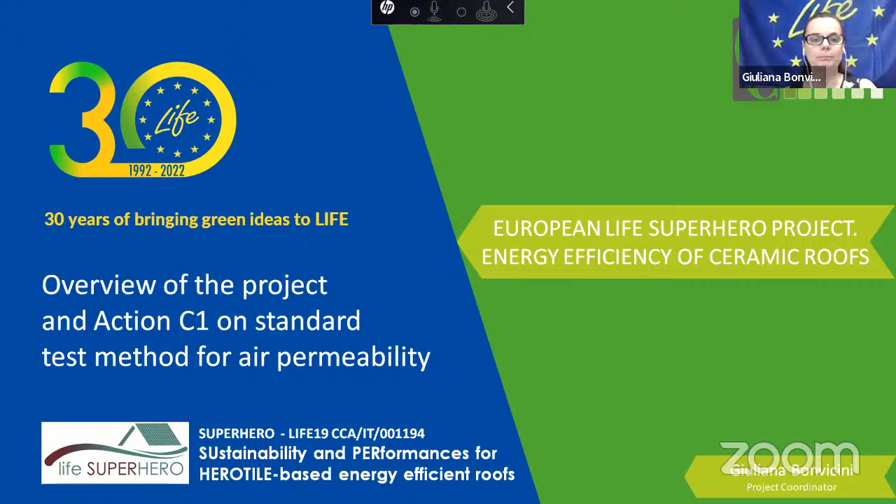And we focus specifically on action C1, which is the development of a standard test method for air permeability.

The problem that we want to face in our project has been quite well introduced by the first speaker, Elena, because as you know, we have to face climate change in these few years, and we had to face summer heat waves many times. Of course, this means that the urban heat island effect in the city and surrounding areas is quite exacerbated, and this creates building overheating while people are living inside.

And people, in some way to reach maximum comfort living in the city, use air conditioning, and that means higher emissions of gas and also high energy demand. And this creates again summer heat waves in the city.

So this is a vicious cycle that we, in some way, want to stop or interrupt. The strategies to do so could be divided into two different goals: the adaptation strategy and the mitigation strategy, with different solutions.

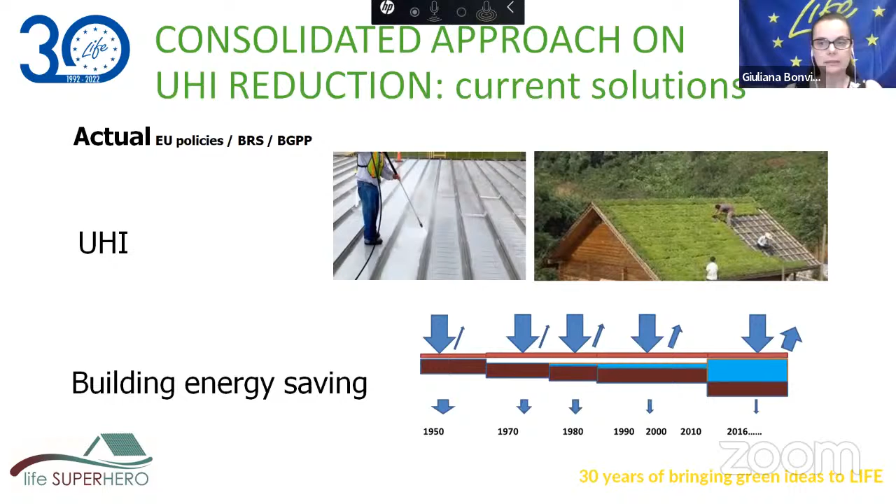What is the impact of roofing technology on the urban heat island effect? I can present this slide because it's a summary of current solutions that we have, for example, in our regulation framework in Italy.

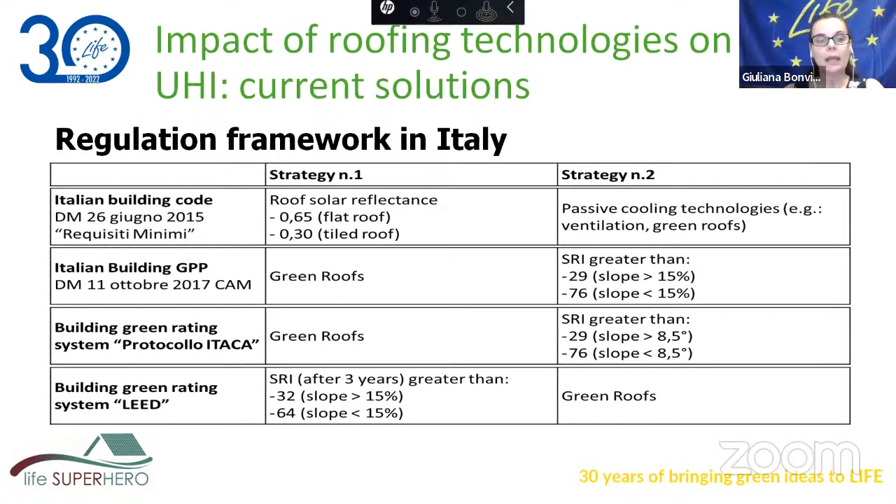If you go through it, we have different codes: the Italian building code, the Italian building green public procurement, a building green rating system called Itaca, and also a building green rating system called LEED.

If we look at the solutions proposed in this regulation, we see, for example, roof solar reflectance, green roof as I've already said, and just one in the Italian building code, we have passive cooling technologies based on passive cooling ventilation.

So if we speak about green roofs, or about flat roofs with tiles, there's no way to push our technology and our product, because we want to push the use of roof tiles made by clay.

What do we propose with this project? We propose a solution using the ventilated and permeable roof, as a sustainable strategy to reduce building overheating.

We can combine with our solution a ventilation system due to the dissipation of heat from the sheathing and roofing material. At the same time, we can couple it with the high permeability of the roof tiles, because we have a discontinuous covering of the roof.

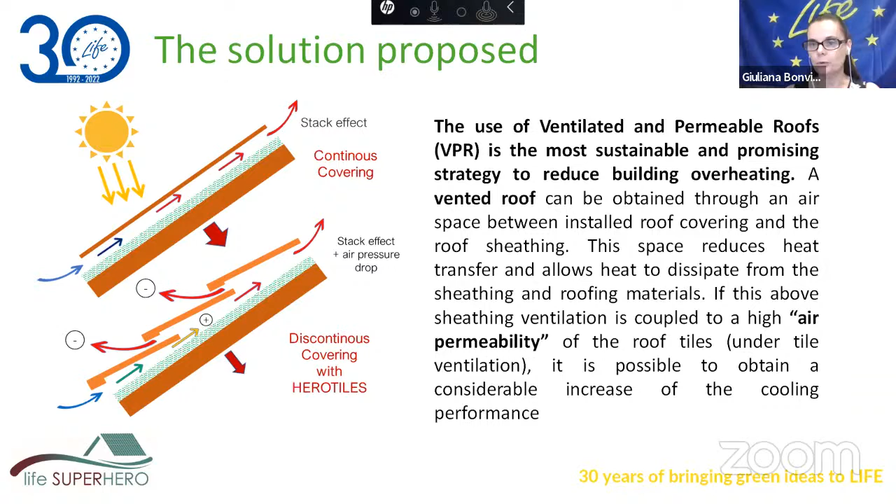And in this way, it's possible to obtain an increase in the cooling performance of the roof, and for this reason, also of the building.

The background comes from another European project called LIFE HEROTILE. This project, already finished, made tests and developed roof tiles with a particular specific shape made by clay. There's no additive, no new material, no non-natural additives in the mix.

This kind of roof based on Herotiles can reduce cooling energy by up to 50% compared to other solutions. But what happened? We found a solution, but we don't have any possibility to push it, because right now the regulation doesn't recognize the cooling potential of ventilated permeable roofs.

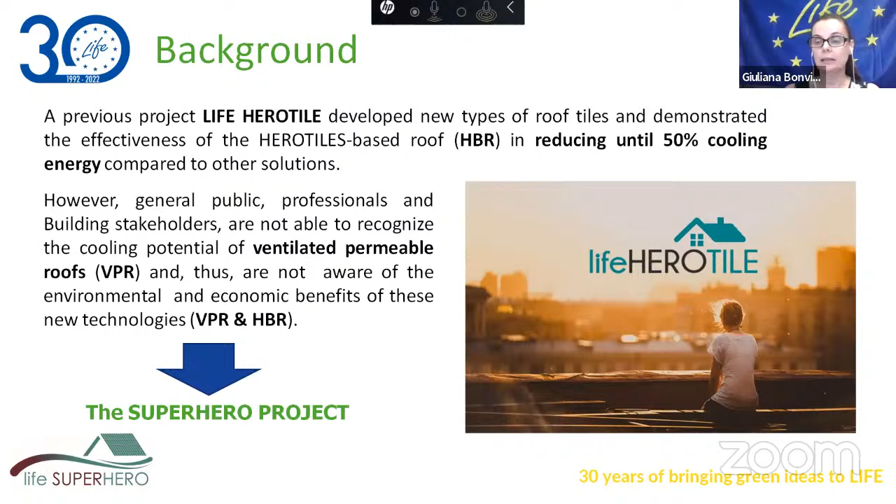So, for example, the general public, the professionals, and the building stakeholders are not aware of the benefits of these new technologies. For this reason, we presented a new proposal for the Superhero project.

I present here the consortium. The consortium is made up of Confindustria Ceramica and Hispalyt, which is a perfect host for us today. They are the Association of Tile and Brick Producers, the Italian and Spanish associations.

We have in the consortium Industrie Cotto Possagno, Terreal, and Edilians, which together cover more or less 50% of the European production of roof tiles made by clay.

And then we have Centro Ceramico, that's me, and the other speaker representing CTMNC, and also Università delle Marche. We are three research centers in Italy and France, able to test the performance of the tile roofs.

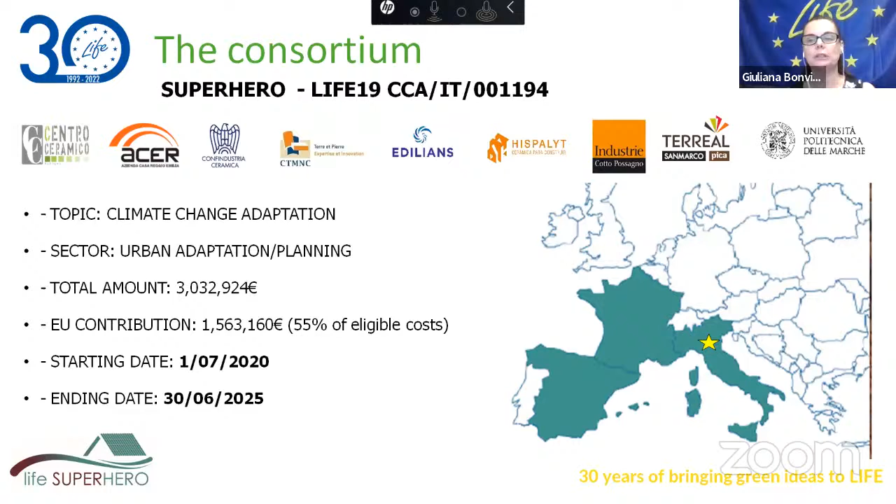The project is quite long, it's 5 years, under the LIFE program, and the specific topic of this program is climate change adaptation. We started the project in summer 2020, and we hope to finish on time in June 2025. What are the objectives and the scope?

Life Superhero is a best practice project. We want to promote the use of this ventilated permeable roof, because we strongly believe it could be the perfect system for passive cooling of the building, increasing building occupants' and city summer comfort—this means an adaptation strategy.

And also, we think it's possible to decrease the building's energy use and greenhouse emissions, offering a mitigation strategy for the situation we have to face right now.

To do so, we exploit the activity in 4 main pillars illustrated here. The first action, C1, is a standards and regulation proposal. We want to overcome the lack we face in regulation to diffuse the ventilated permeable roof, acting at different levels: diffusion on regulation at European level, at member state level, and at technical scale. We want to go from product to building level.

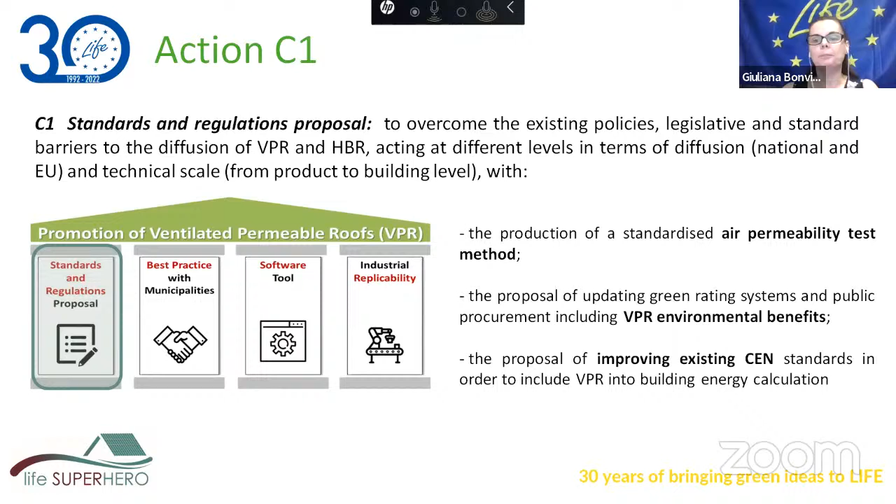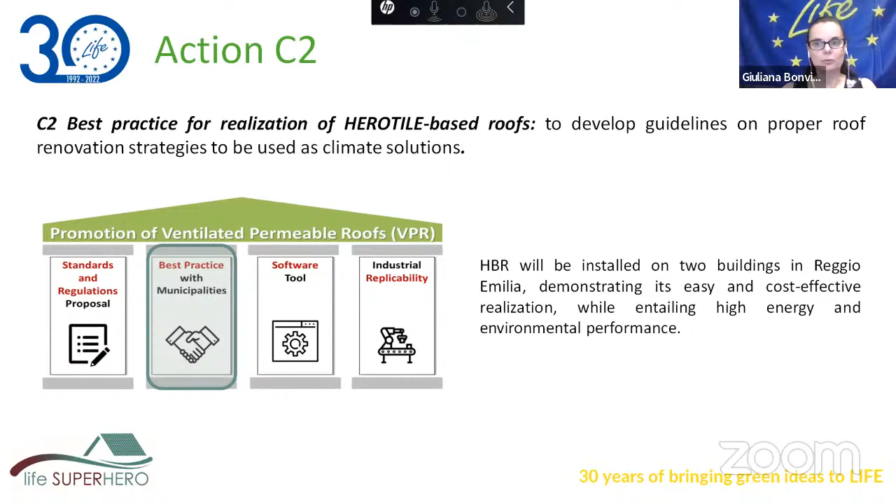Implementing a standardized air permeability method, proposing an update on green rating systems, and improving existing CEN standards for building energy calculation. The other main action, C2, is the best practice for realization of Herotile-based roofs. With this activity, we want to develop guidelines to renovate buildings using innovative solutions for the roof. The speaker after me will focus specifically on the technical details of this action.

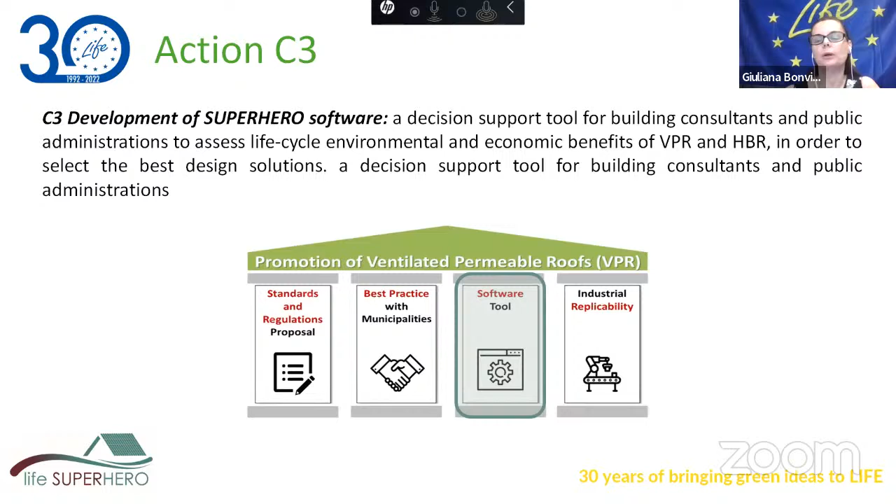Then we have action C3, regarding the development of Superhero software. Because if we want to push this solution on the market and in regulation, we need a support tool for building consultants and professionals, so they can calculate different performances of different solutions applied in a specific building, and have a supporting tool for administrations and consultants to make the proper decision.

Then we have action C4, on replicability, transferability, and best practice creation for tile producers, since we have 3 producers inside the consortium. We want to demonstrate that producing roof tiles for a passive cooling solution with clay is quite easy. So even if they don't produce permeable roof tiles right now, they can change something with no extra cost in the production cycle and be prepared to put this kind of product on the market. We want to amplify all the benefits we can reach thanks to the project.

I will focus right now on the C1 approach specifically, since my presentation will focus on this action. As I said, regulations in force on building energy efficiency are mainly focused on winter saving, neglecting effective solutions for summer cooling.

What we have identified in the regulatory framework to address with this project is the lack of standards. We have no standard properly defining the air permeability of roof tiles. We also found a lack of acknowledgment of ventilated permeable roof environmental performances in building rating systems and green public procurement. And we think something is missing in the standard method to assess VPR cooling performance — we need a method to make calculations and decide which is the best solution to install in a building.

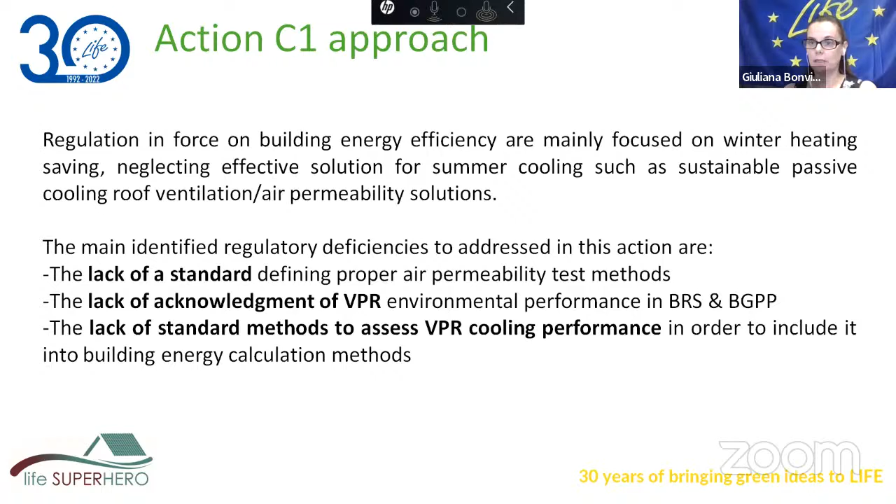I will focus my presentation on action C1.1, specifically the air permeability test method, but action C1 is organized into 4 subtasks overall. One is the method, which we will see after.

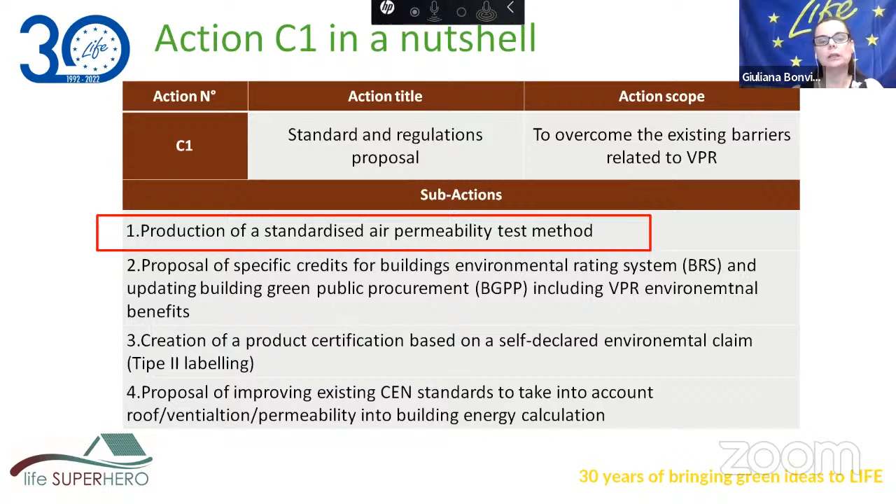The other is the proposal of specific credits for building environmental rating systems and green public procurement, including the VPR benefits we want to show and demonstrate with this project. We create a product certification based on a self-declared environmental claim, label type 2. And we will also propose an improvement of the existing standards to take into account the ventilation and permeability of the roof in building energy calculations.

Focusing on action C1.1, the air permeability test: we need to implement this test because, to put a product on the market, we need a European technical assessment, called an ETA, named Air-permeable roof tiles. To produce this document, we need to...

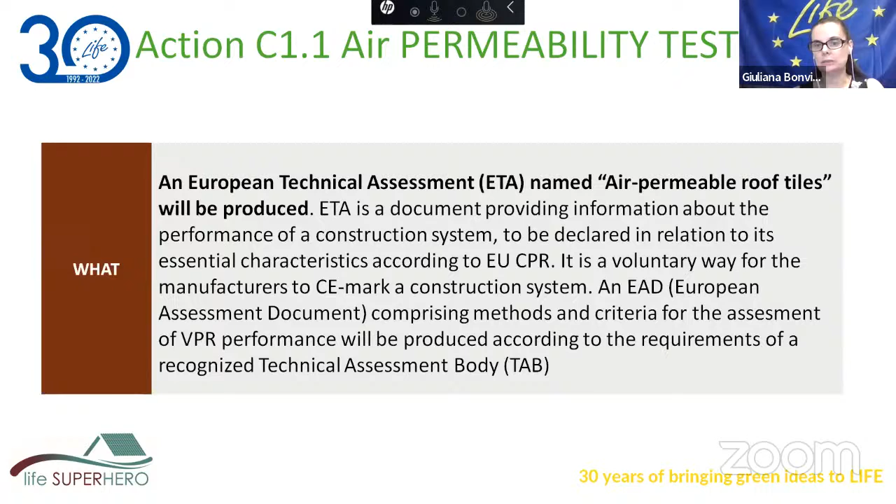develop a testing method that has to be taken into account by a recognized technical assessment body for the assessment of VPR performances. In this way, we can voluntarily apply the CE mark to this construction system, and we will be ready for the market.

I don't know if you are aware of the ETA procedure, so I have a slide summarizing some points. The ETA is based on a European Assessment Document, which contains a general description of the construction product under investigation, the list of essential characteristics that we consider relevant, and importantly, the method and criteria for assessing the performance of the product. We also need to list the principles for implementing the system for assessment and verification of the constancy of performance.

This procedure could be simple, but it could take 5 months if an EAD is already present. We think we need a couple of years to develop it, so we hope to finish all the work during the project.

To do so, how to proceed?

In the proposal, we arrange a round-robin test in 4 laboratories: Centro Cerámico, Università delle Marche, CTMNC, that are in the consortium of the project, and also we involve BMI, an external laboratory that made some tests in the previous project. We organized this round-robin test to collect data and figures for the definition of the standard ETA and the CEN.

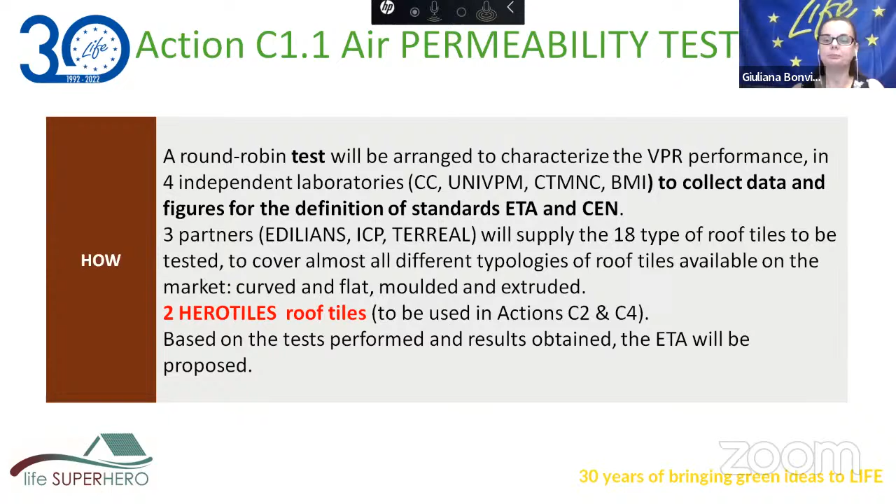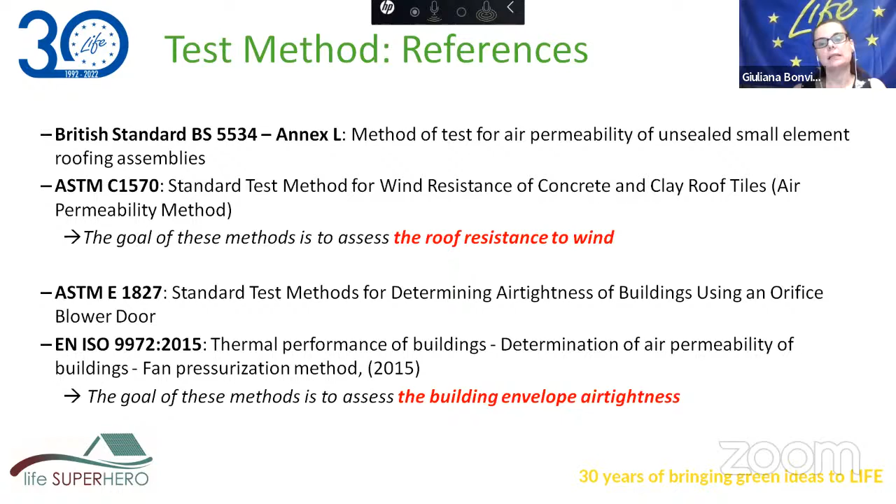For the test method, the first thing for us was to have some references on existing standards. So we found a British standard and an ASTM that are listed here, but the goal of this method is to assess the roof's resistance to wind, which is not exactly the property we want to measure. Then we also have another ASTM and an ISO, but the goal of these 2 methods is to assess the building envelope airtightness.

So we decided to take into account the British standard BS 5534, specifically Annex L. We used this standard in some way to replicate the equipment that we produce and have in the 3 laboratories, so we have 3 twin pieces of equipment in our laboratories.

As you can see, the scheme is quite simple. We have an airflow generator, an airflow meter, and a pressure difference measuring device. Of course, we also need a system to weigh the samples, to measure the ambient temperature and local air where we will perform the test, and a pressure difference measuring device because we want to test a different range of pressure.

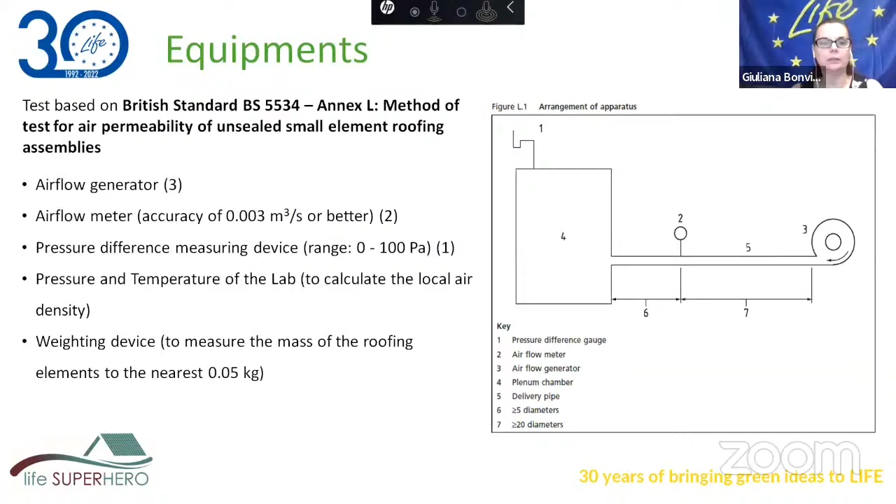Specifically, the equipment is made of a box, called a plenum chamber, made of wood. I have some pictures in the next slide showing the top, on which we will install our roof tiles.

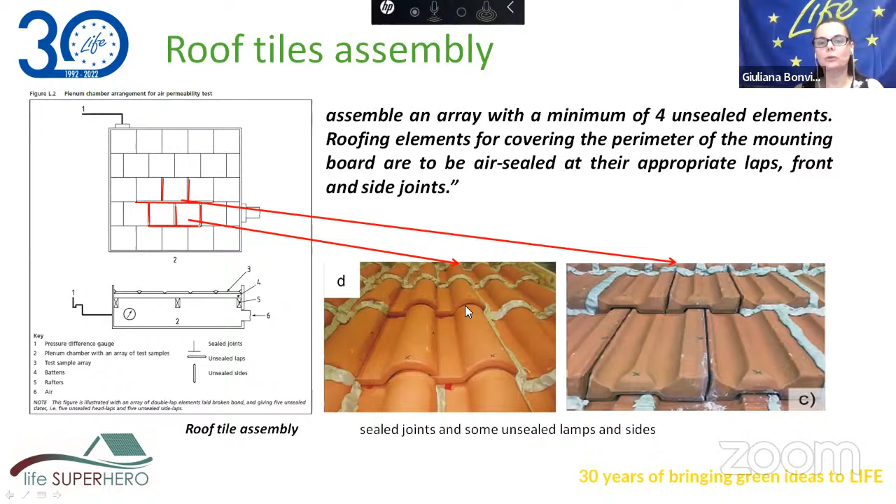According to the standard, we decided to follow it also for this issue, leaving free just 4 of the roof tiles put in the installation.

The experiment consists of blowing and also sucking air down the pipe into the plenum chamber. We will record the difference in air pressure between the inside and outside of the box, and also measure the volume of airflow rate inside the pipe.

In this way, we can determine the pressure drop coefficient that is also used to calculate the permeability factor, because we want to measure the possibility of this discontinuous layer to dissipate heat from the roof, from the building, to the outside.

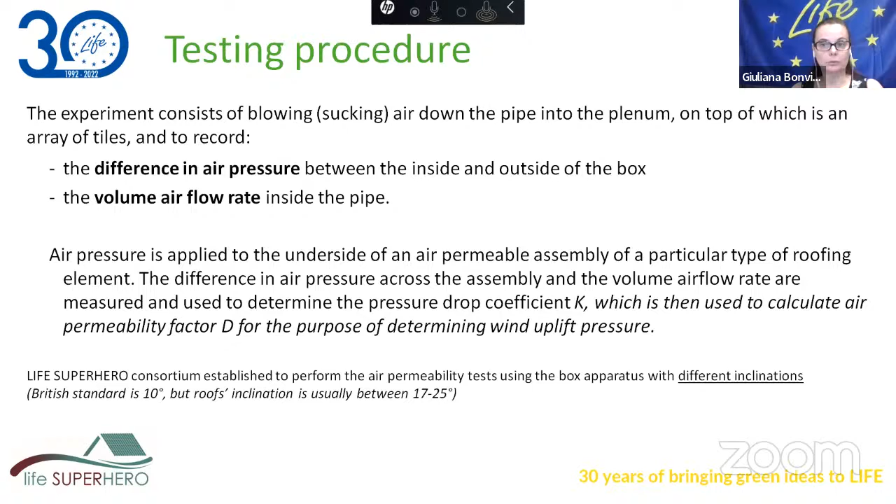Here you will see some of our equipment. This is the one at CTMC. This is the one, for example, at Centro Cerámico. This is the one used at BMI, with an installation of roof tiles on top.

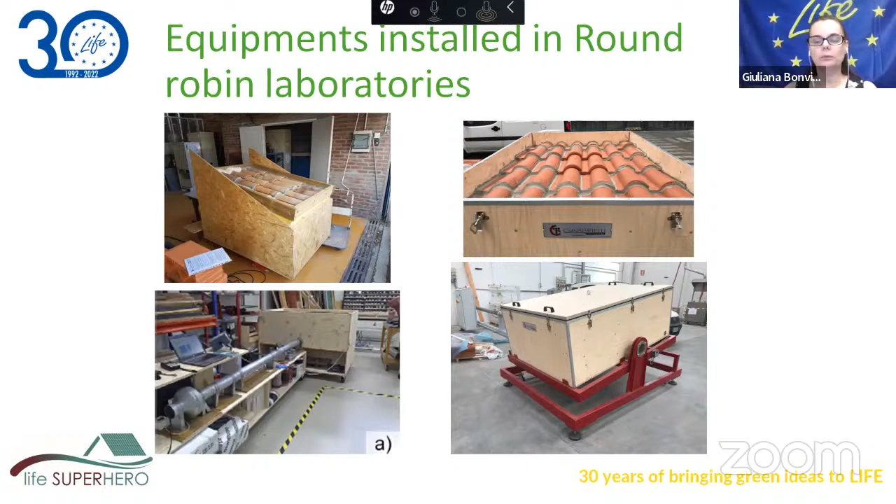So we perform the test, we have to measure and calculate, and also compare the results from the 4 laboratories from a statistical point of view, in order to calculate the air permeability and define the performance of the specific roof tiles installed on the instrument.

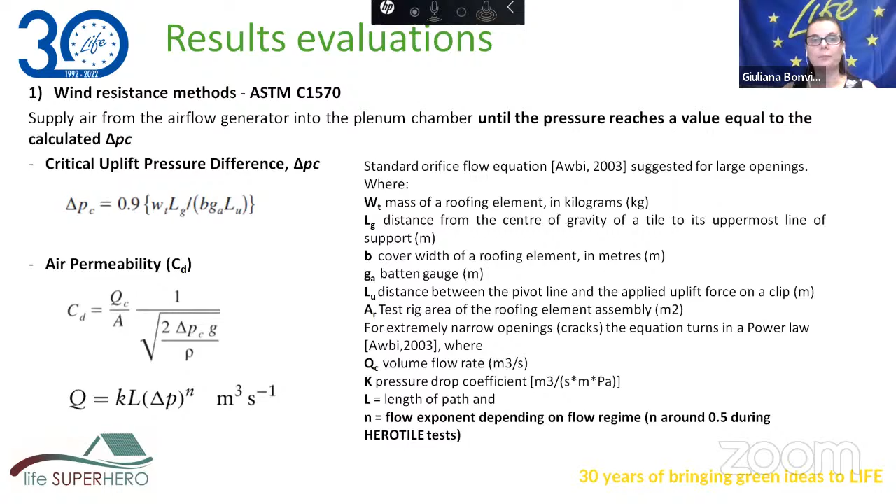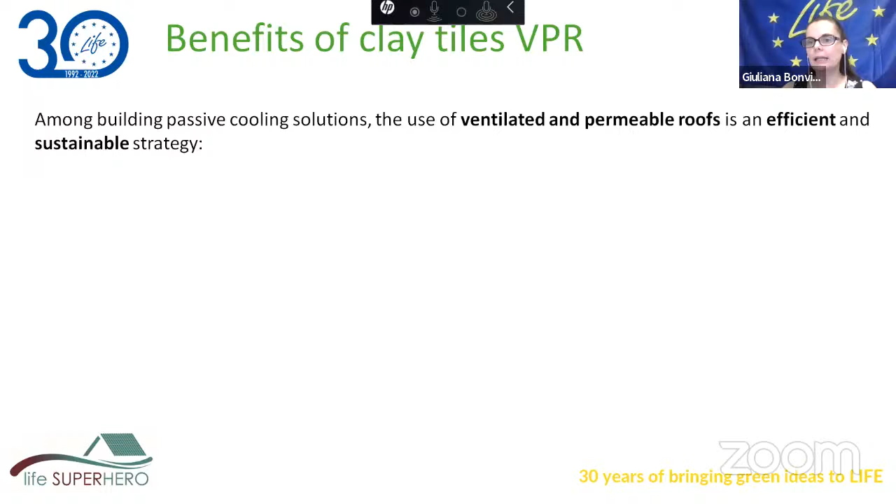All this to do what? We strongly believe that among passive cooling solutions, the use of a ventilated and permeable roof is a sustainable strategy. We can use it to perform and in some way increase the energy rate of the building.

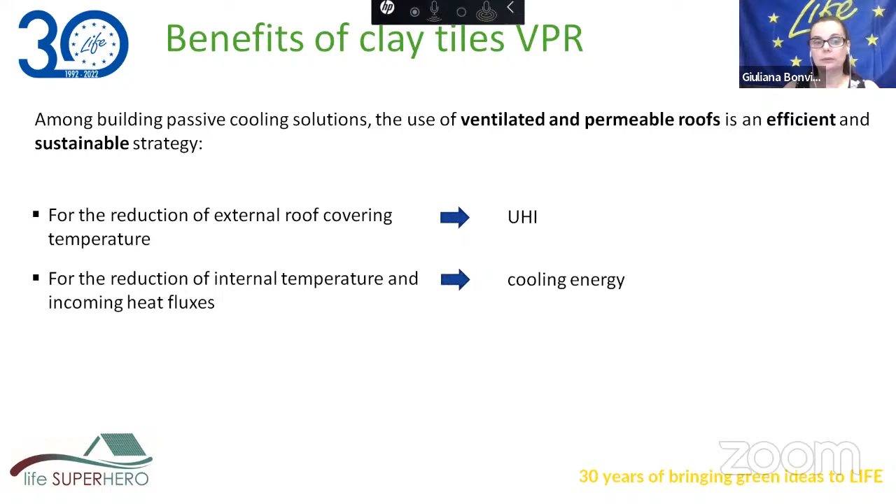We can reduce the external roof cover temperature. In this way, we can mitigate the heat in the surrounding area, mitigating the urban heat island effect. We can also use this installation to reduce internal temperature and incoming heat fluxes, meaning people won't be forced to use more energy for cooling, decreasing emissions of heat, pollutants, and gases in the environment and surrounding area.

We have also demonstrated this in LIFE HEROTILE. We can do this at low cost because, as I said, the transformation of the production cycle is not so expensive, and the new installation of the roof with the tiles is not expensive either. There's no higher cost, no additive cost.

We know that our product, roof tiles made by clay, are durable and sustainable materials. So we can also use this product in a circular economy, as we are doing right now. We also combine this solution with other solutions, so it's not the only one.

So I hope that our study will help push clay roof tiles onto the market and help to face the situation of climate change right now. Thank you very much.

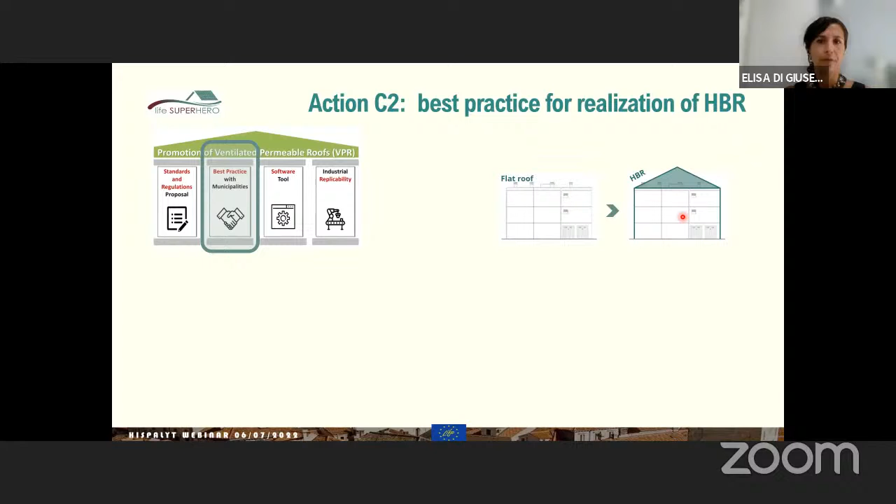The action will be realized on 2 existing buildings, which are currently covered by a flat roof. Over this flat existing roof, a new attic floor will be realized, covered by hero tiles. Monitoring activities will be carried out in these buildings before and after the implementation of the HBR, in order to collect useful data on the thermal performance of the roofs, the indoor environmental quality, and the occupants' behavior.

Action C2 is composed of 3 sub-actions. The first is about the thermal, energy, and behavioral monitoring activity in the buildings. The second focuses on the HBR project and installation. And finally, the third provides the creation of a data sharing platform to collect and share monitoring data with non-expert users, but also with stakeholders and interested people.

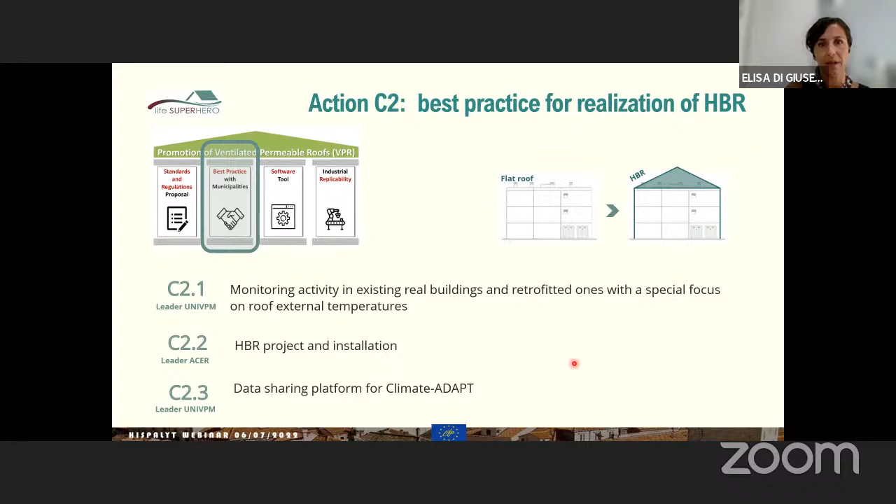So the main contents of my presentation are the following. I will present a description of the Life Superhero building pilots and the renovation plan they are involved in. Then I'll present more details on the monitoring activity on the pilots and the way of data sharing. Then I'll present the preliminary monitoring results on the buildings obtained during last summer. And finally, I will present another activity concerning the measurement of the radiative and optical properties of the building materials, especially the HBR tiles.

Going into some details of the buildings, they are 2 existing multi-story residential buildings located in Reggio Emilia, Italy, with a climate in the range of Mediterranean and humid continental, which is characterized by quite hot summer, so by special thermal stressors in summer.

These buildings have been built in the 80s and have a flat roof. They represent a good context to support the creation of the best practice to shift the flat roof into a lightweight attic floor with HBR. Each building will be covered by a different roof tile typology: Portuguese tiles supplied by our partner ICP in one case, and Marseillaise tiles supplied by the partner Terreal in the other building.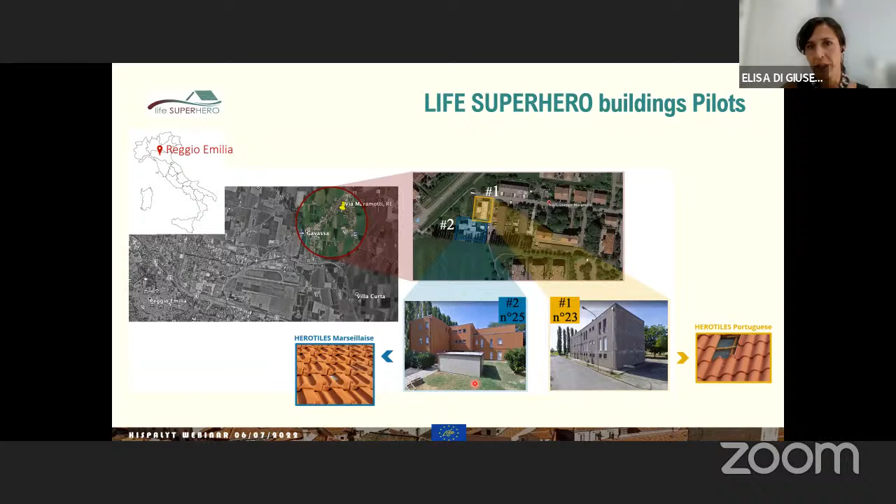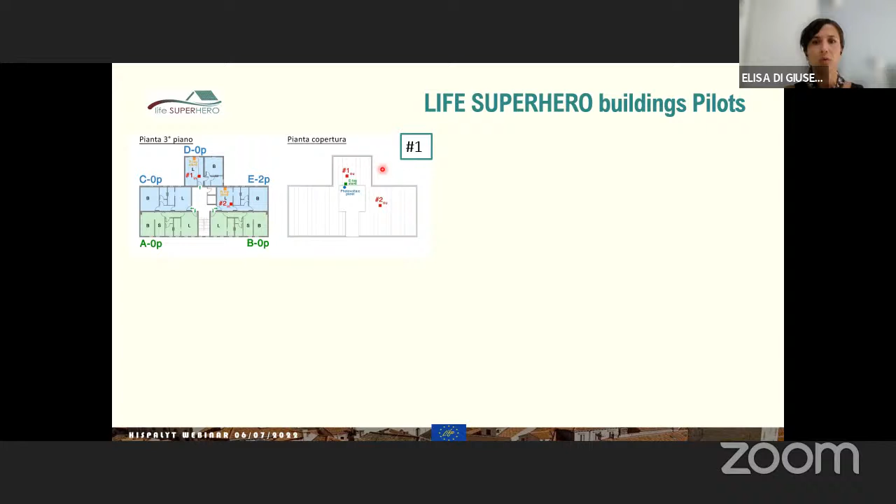The first building has 5 flats in the last level, with a covering surface of about 240 square meters, while the second building has a flat roof in both the second and third levels, covering again 5 apartments for a roof surface of about 350 square meters.

We are going to totally monitor 25 rooms in the buildings, which are actually occupied by 11 people. Unfortunately, some flats are empty at the moment. However, we are also monitoring their thermal condition and energy performance in order to set a proper baseline for the assessment of this performance, even in unoccupied conditions.

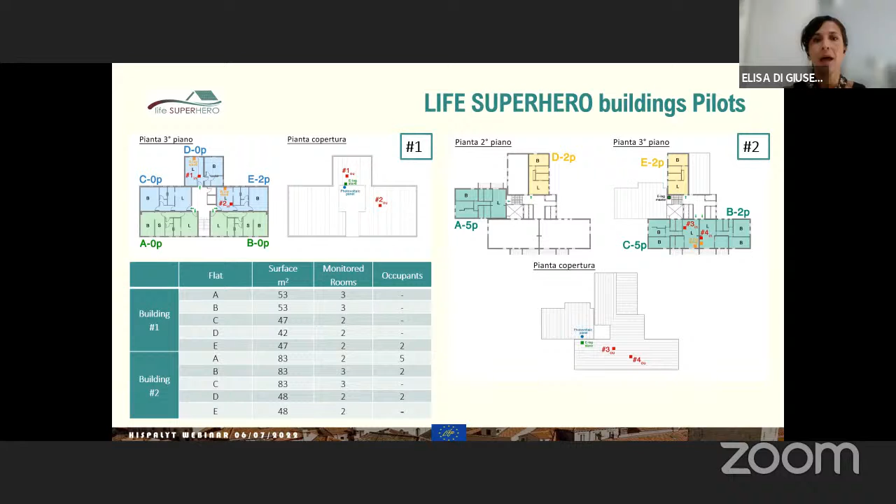The future HBR installation is part of a broader renovation plan which involves the buildings, and this plan will be carried out in 2 steps. During the next autumn, the buildings will be retrofitted with an external insulation layer, and by also replacing the existing windows.

Then during autumn 23, the new attic floor with the HBR will be realized. Consequently, we will monitor the energy and thermal performance and occupants' behavior in 3 different conditions: the existing state, during 2 summer periods, as we already started last June 21 and will continue this summer; then the buildings with the renovation of only the vertical envelope; and finally with the addition of the HBR.

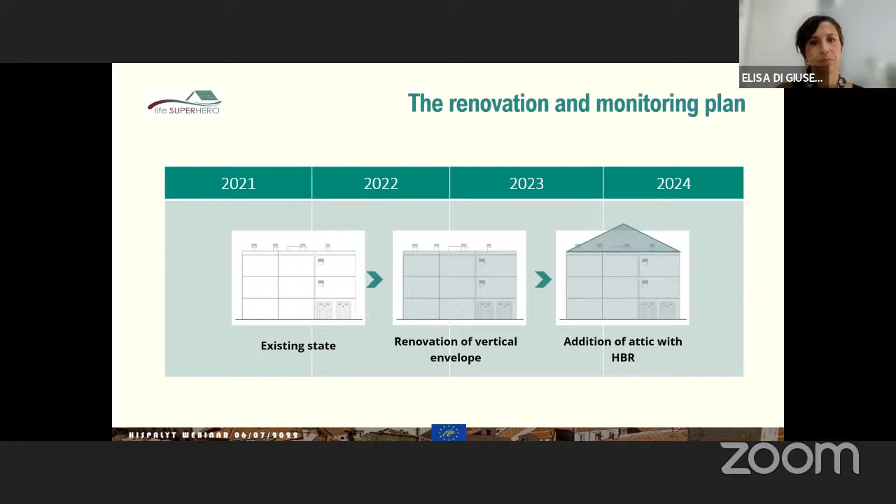A complex monitoring system was implemented in the buildings last year to detect the indoor and outdoor environmental condition, the occupants' behavior, and the roof thermal performance. It consists of low-impact wireless devices connected with the LoRaWAN communication system in order to get a lower impact on users' daily life, and also to allow an easier transmission and data storage. Data are collected from different sources and then aggregated within a database.

A weather station was installed at the height of about 1.5 meters on the roof of building 2 in order to monitor the local outdoor climate condition, such as air humidity and temperature, global solar radiation, wind velocity and direction, and the rain.

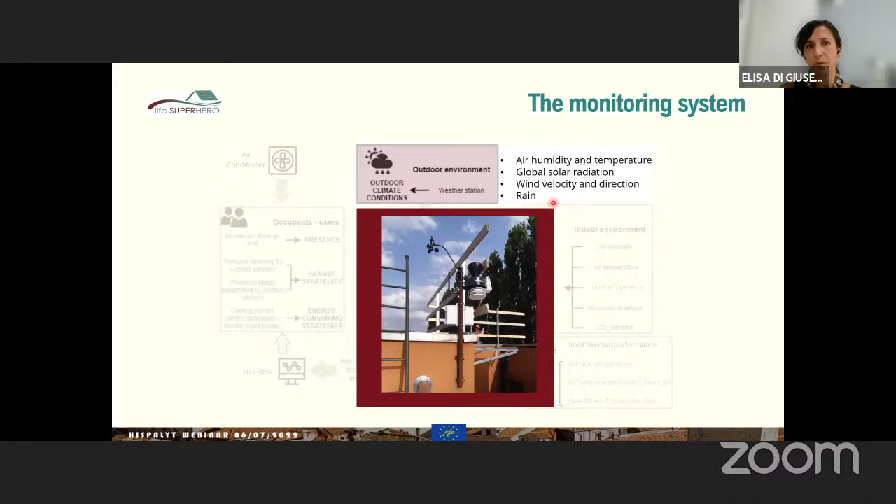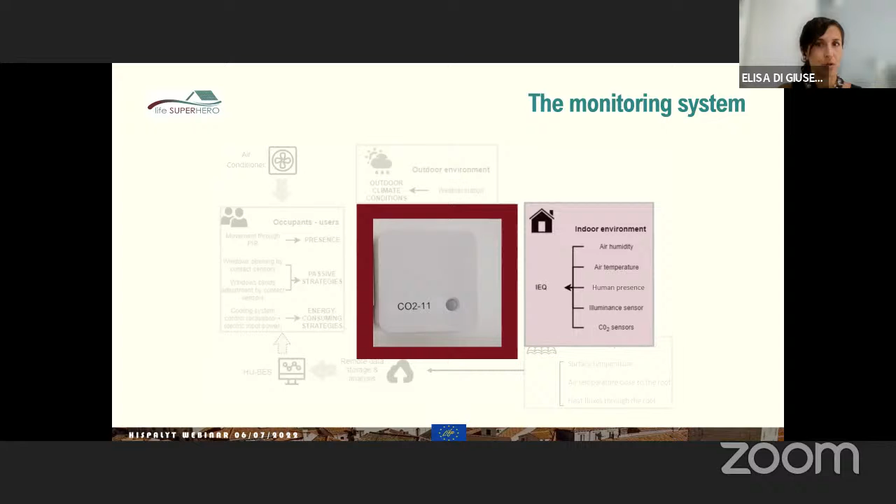In the flats, some sensors, as you can see in the picture, were mounted on the wall for measuring the indoor environment in the living rooms and bedrooms, which are the air conditioned rooms in the buildings. In particular, these sensors detect air humidity and temperature, human presence, illuminance, and CO2 emissions.

Building occupants' actions are also monitored to evaluate the way people interact with building systems to improve their comfort conditions. In particular, we are detecting the windows opening and closing activities with these contact sensors, and also the air conditioning used through some energy counters.

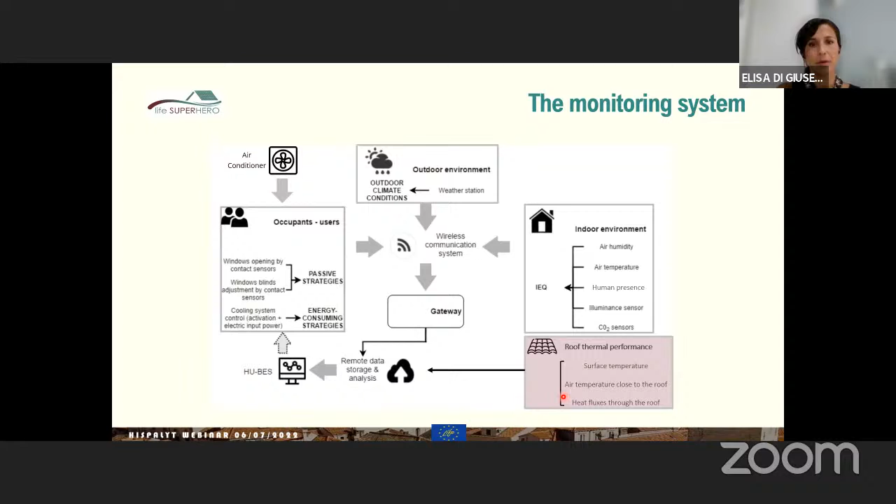We are also regularly performing interviews and surveys with the building's occupants to assess their overall thermal sensation and comfort. Finally, we installed some specific sensors to monitor the actual roof thermal performance.

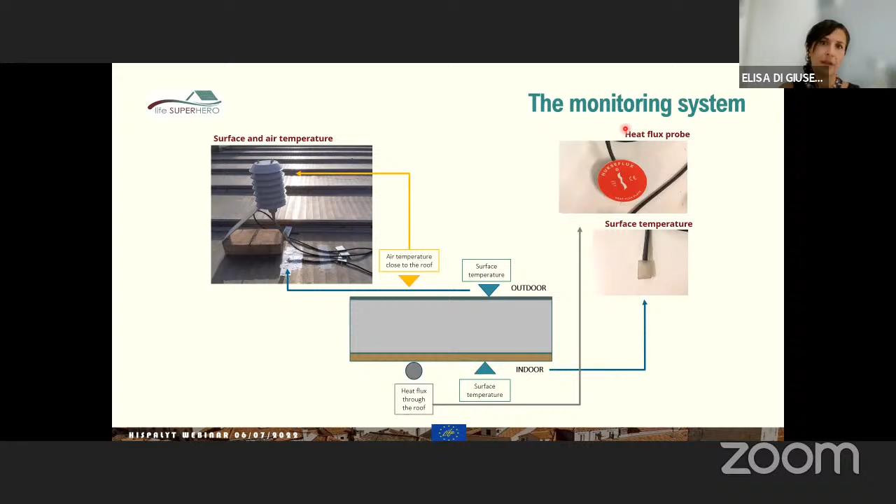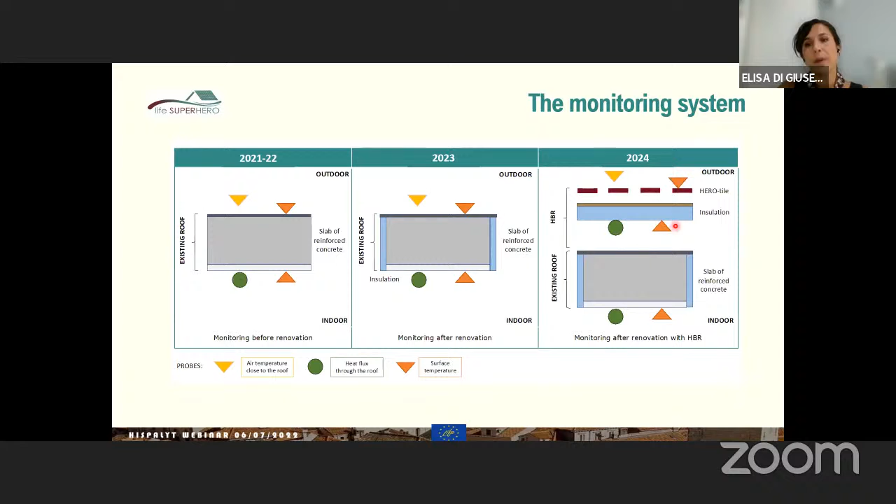Of course, during the next monitoring period, especially when the HBR will be installed in the last project year, the number of probes to detect the roof thermal performance will increase in order to measure the thermal properties in the different interfaces of the HBR, and especially in the ventilation channel.

Within this action C2 of the project, we are also developing an interactive web-based platform to share monitoring data to different stakeholders. It is named Human Behaviors Monitoring Data Sharing, so HUBES.

HUBES will show qualitative and user-friendly data to unspecialized users, for instance the building's occupants themselves, while it will show quantitative data to specialized stakeholders and policymakers, and also to researchers and to all people interested in the project.

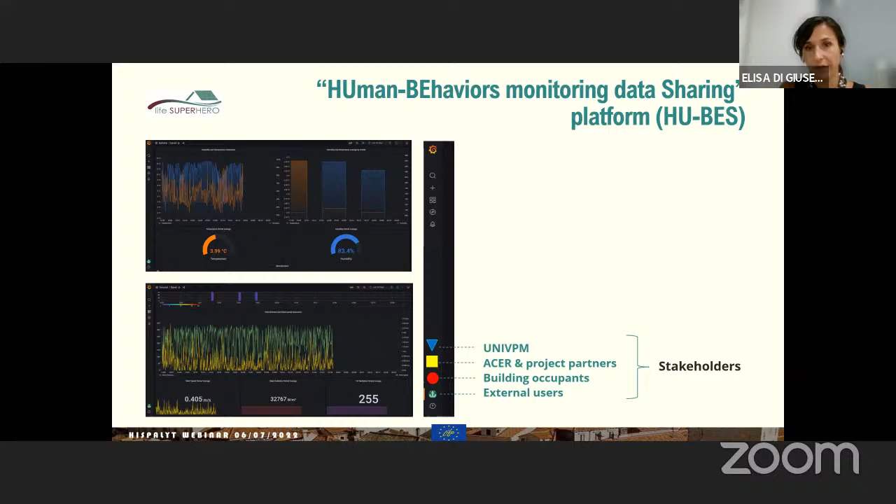This platform will be part of the project website and also diffused through the Covenant of Mayors and through the Climate Adapt platforms. You maybe know these platforms. The first one, Covenant of Mayors, is a movement of thousands of local governments for local climate and energy actions, while Climate Adapt is a partnership between the European Commission and the European Environment Agency on climate topics, and its goal is helping users to access and share data and information.

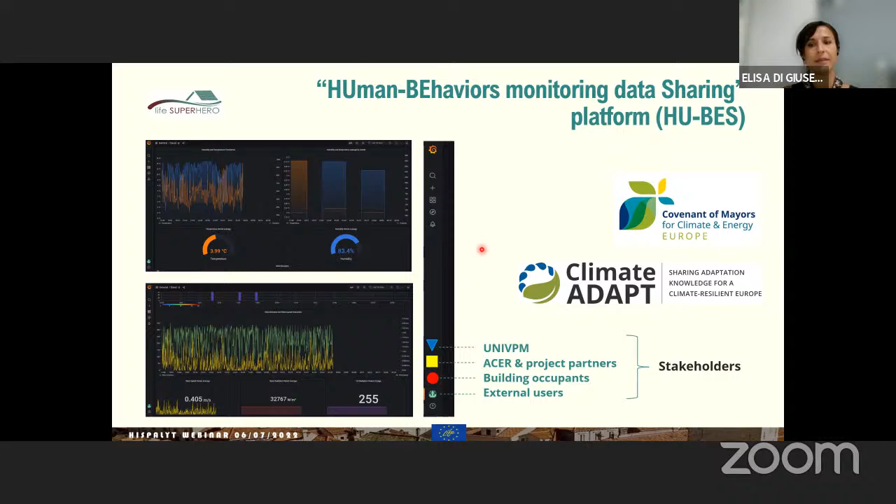So up to now, we are building the architecture of the platform. We managed to insert the separated data from each sensor, and then we are going to aggregate them in selected KPI, that is key performance indicators.

Concerning the inhabitants of the buildings, a web application will allow them to download data and also to receive feedback on their energy behavior and on the apartment performance.

The platform will consist of the user profile, where access to only certain information can be allowed. Then a visualization of the plan of the apartment with the location of the installed sensors, a display of the quantities monitored by each sensor and of aggregated KPI, and finally information on the status of the sensors.

We are also planning to include a message notification system to improve the use of information and also to provide feedback to the users. In this way, the information can be sent directly to the user's devices without necessarily having access to the platform.

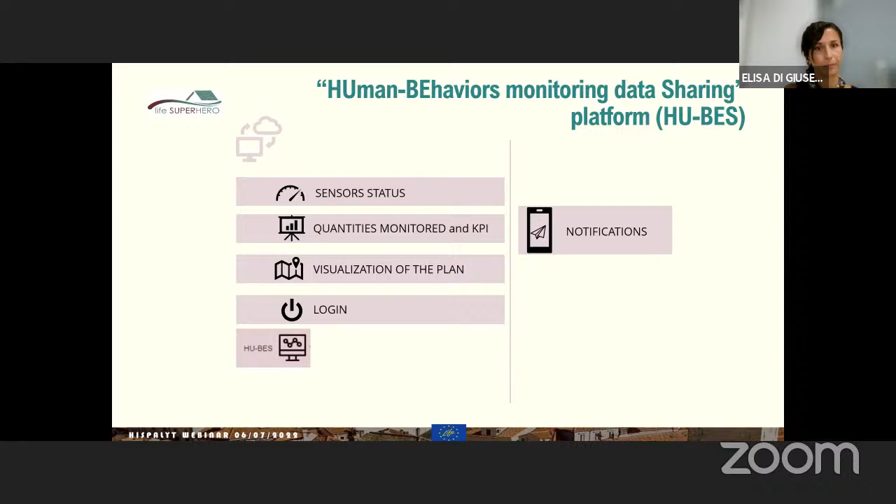Concerning the indoor environment, in these graphs you find the indoor temperature with the red line, together with the external temperature in the black line. The empty flat without air conditioning is characterized by a very high indoor temperature, even over 30 degrees, while the occupied flat has a lower indoor temperature between 23 and 28 degrees, depending on the use of the conditioning system. This is also highlighted by the irregular trend of the line.

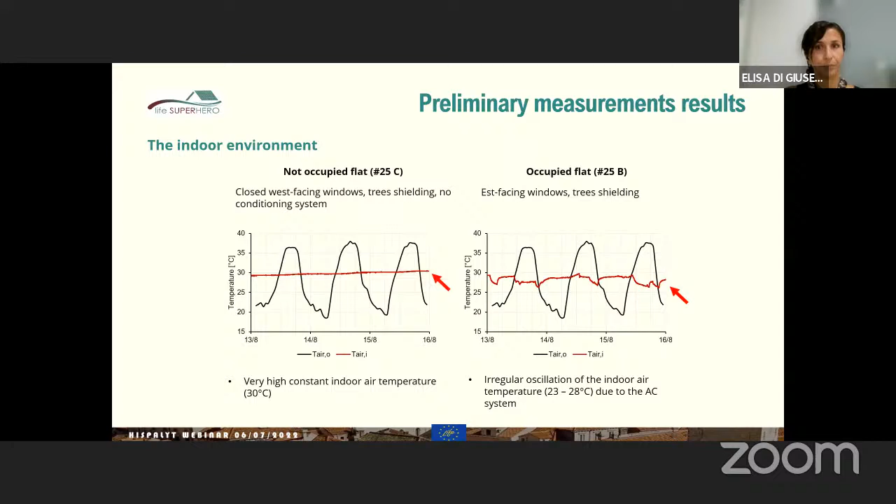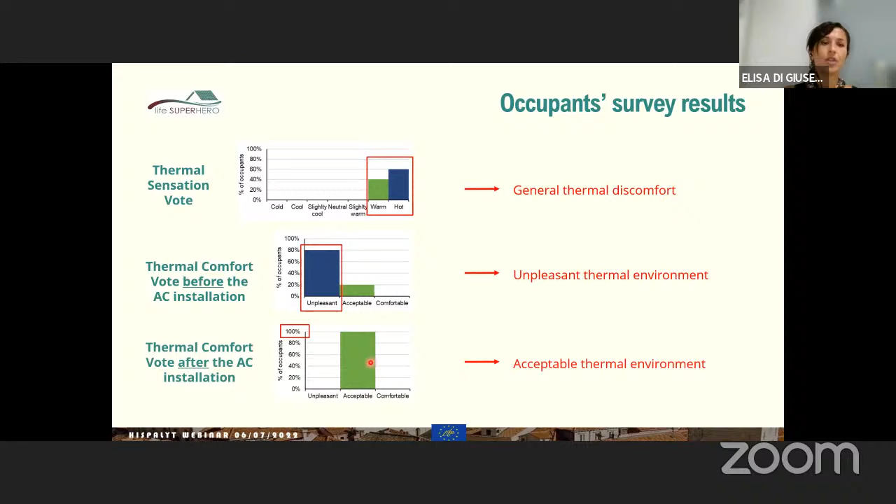Questionnaires provided to the occupants of the buildings confirmed a general thermal discomfort sensation in the indoor environment. All the occupants consider their thermal environment between warm or hot. 80% of them consider it unpleasant in terms of thermal comfort before the installation of the air conditioning, while all of them consider it just acceptable when the cooling system is installed and used.

From the results I presented, maybe you could notice that the recorded heat flux through the existing roof are actually quite low. Indeed, even if the buildings were both realized in the 80s, they present an insulated roof, which is not a common practice in Italy for that period.

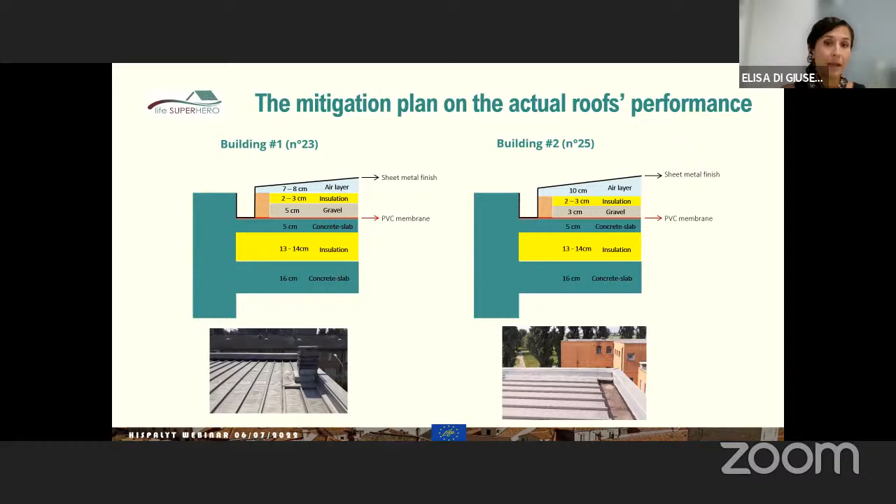We did not know this before starting the project, but we recently realized an inspection on the roof and also discovered that a further intervention has been carried out some decades ago, maybe to improve the waterproofness or the sound insulation of the roof. As a consequence, the existing roof has better performance than that assumed initially. This risks making the baseline performance of these buildings not really representative of typical Italian 60s, 70s, 80s buildings, which means maybe reducing the impact of installing the HBR in the next years.

So in order to mitigate this risk, we decided to perform two further actions. Firstly, in some areas of the roofs we removed the additional layers, and this summer we will carry out new thermal measurements.

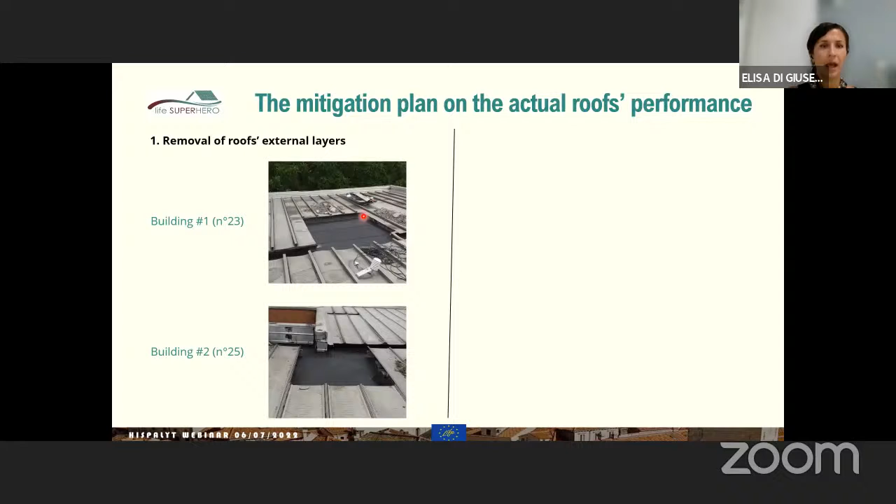The second action is that we are realizing reliable energy models of the buildings, which we can then use to perform parametric analysis, parametric simulations of the performance of the buildings, eventually defining new baselines. This means we will calibrate these energy models against the real collected data, and then we will perform the simulations also in a condition of the roof without insulation, to define a better baseline and a better comparison of the performance before and after the installation of the HBR.

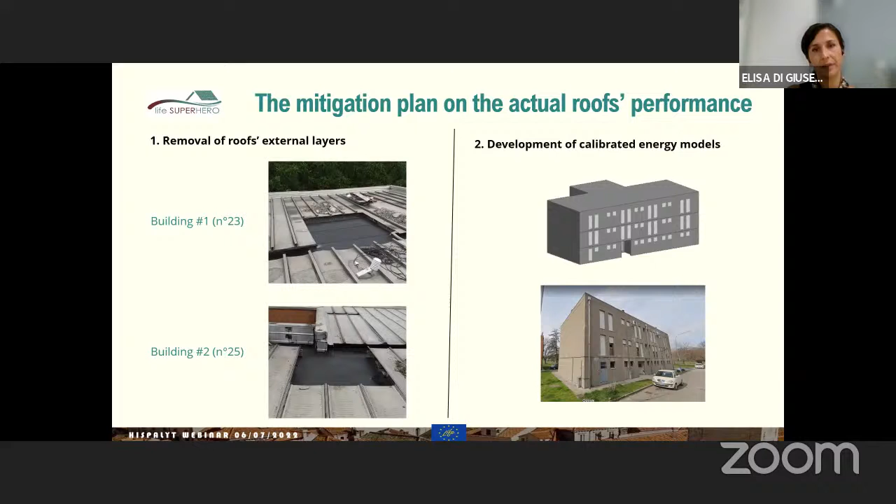And finally, here I'll present a further activity we are carrying out, which is not really part of action C2, but part of another action of the project. It's useful for the calibration of the energy models I just talked to you about, and I think you can find it interesting. We are performing measurements of the optical properties of the materials of the external envelope of the buildings, also including the materials that will be installed, that is the hero tiles.

So actually we started this activity especially from the hero tiles produced by our partners Terreal and ICP. And then in the next month, we will perform further measurements on the material samples removed by the existing roofs of the demo buildings.

We measured the thermal emittance of these samples and also their solar reflectance, and then calculated the total solar reflectance, and from this and from the thermal emittance also the solar reflectance index, SRI.

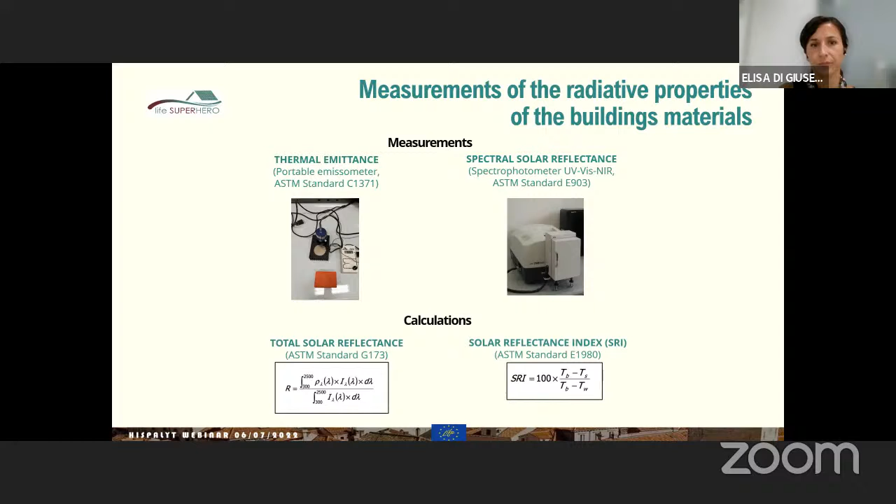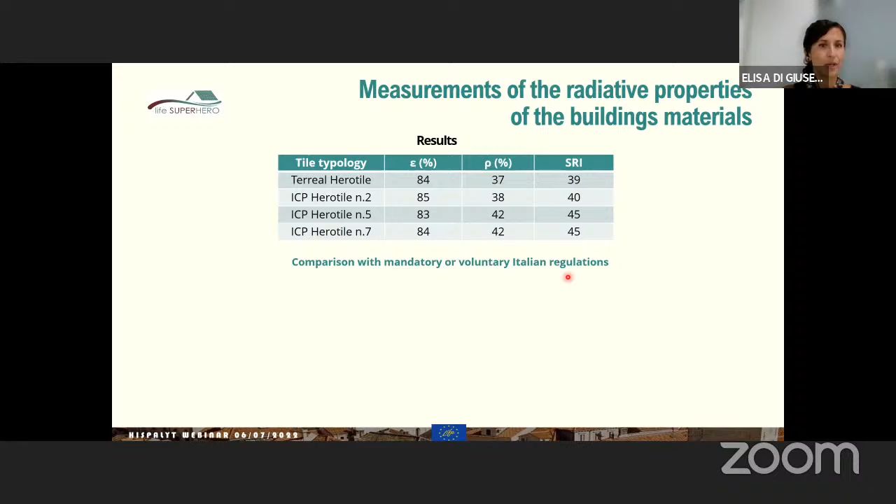So the obtained reflectance is higher than the threshold imposed by the actual regulation on the building's energy performance in Italy. The SRI is higher than the threshold provided by the Italian Green Public Procurement, and also of the value provided by the buildings rating system LEED that you maybe know.

So this result is interesting as it demonstrates a good radiative performance of the hero tiles that can also enhance the global passive cooling performance of the HBR that Giuliana just presented you.

So that's all concerning project action C2, but of course, I'm available if you have some curiosities or questions at the end of the webinar. Thank you very much.

Thank you very much for your presentation, Elisa, and thank you for explaining to us the renovation project to be carried out on 2 existing multi-story residential buildings in Reggio Emilia, Italy, currently covered with a flat roof, where the vertical envelope will be insulated, and finally a horizontal base roof with Portuguese and Marseillais styles will be installed. An interesting project during which the thermal performance of the roofs, the indoor environmental quality, and the occupants' behavior will be monitored by a sophisticated low-impact wireless monitoring system.

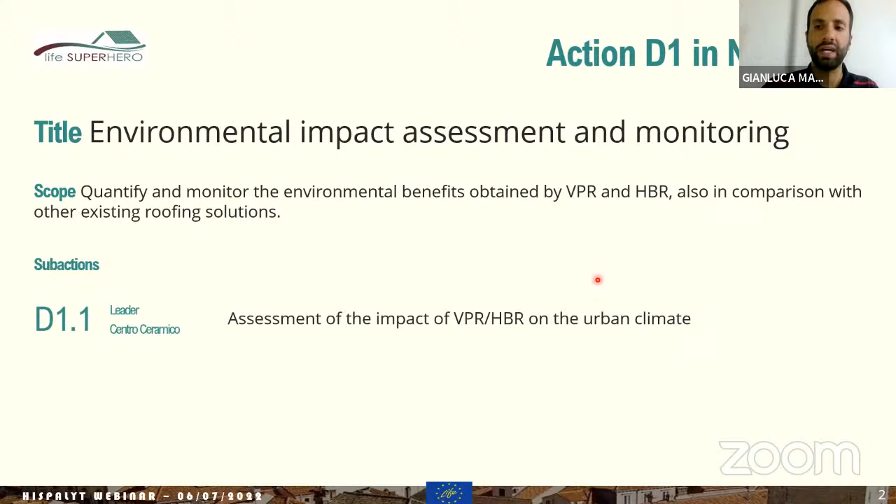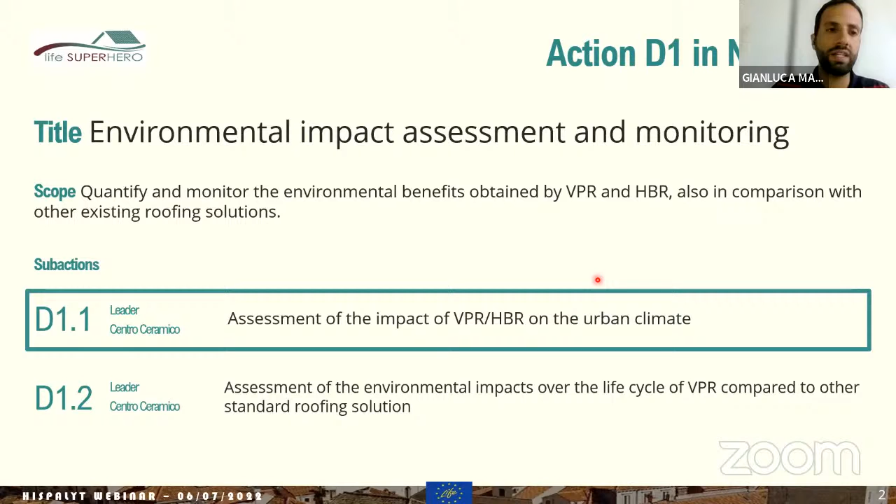The action is subdivided into 2 main sub-actions, which are the assessment of the impact of VPR on the urban environment carried out through both numerical and experimental activities, and the assessment of the environmental impacts over the life cycle of VPR. Today, we will just focus on the progresses of sub-action D1.1, which is the only activity currently started in this action.

Sub-action D1.1 consists of numerical and experimental activities. Numerical activities regard simulations performed through software for urban climate to assess the influence of alternative roofing solutions, such as HBR, cool roof, green roof, flat roof with waterproof membranes, and metallic roof on urban areas.

Experimental activities are instead finalized at the collection of thermal data on demo buildings in Reggio Emilia, used to demonstrate the HBR benefits in terms of surface temperature reduction and to calculate the HBR equivalent reflectance values to be used in the simulations.

The expected results of this sub-action regard the implementation of VPR in urban climate models, the assessment of the impact of VPR on urban heat island compared to other roof types, the demonstration of HBR benefits in terms of temperature reduction in the roof's internal and external surfaces, which is a KPI of the project, and the equivalent reflectance values for the hero tiles.

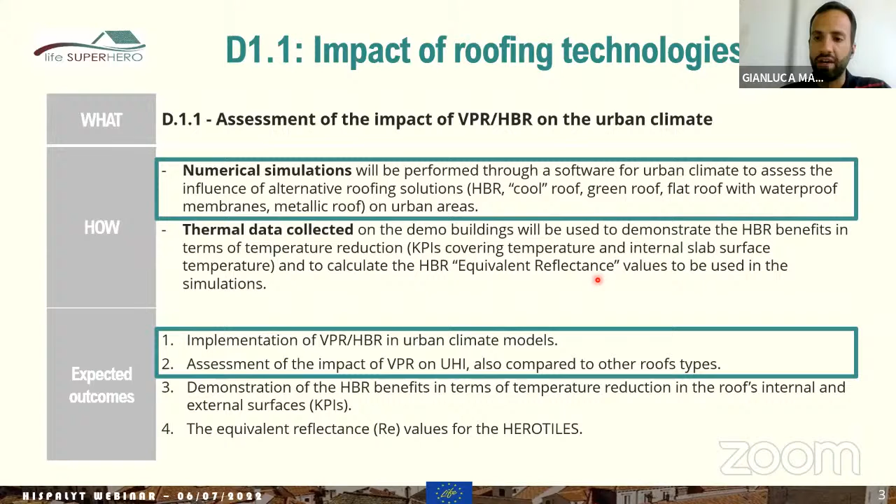As already said, this presentation is mainly focused on explaining the approach used in the numerical simulation and then showing the first numerical results.

But why are we talking about the impact of VPR, the ventilated permeable roofing solution, on the urban heat island? Because of some of the results obtained in the previous LIFE HEROTILE project, as Giuliana already summarized, which demonstrated that VPR can be used to reduce the cooling energy consumption due to air conditioning, and then it permits reducing the heat released by air conditioning equipment in urban canyons. VPR also allows reducing the temperature of the tiles, which dynamically interacts with the urban environment by exchanging heat through convection.

Also, why do we need a comparison with other roofing solutions in our numerical simulations? As already said by Giuliana, due to the regulatory frameworks on urban and building overheating in several countries, in Italy for example, the actual building code sets limits just for the solar reflectance of coverings, while the use of passive cooling technologies such as VPR is just mentioned, and no calculation methods are provided.

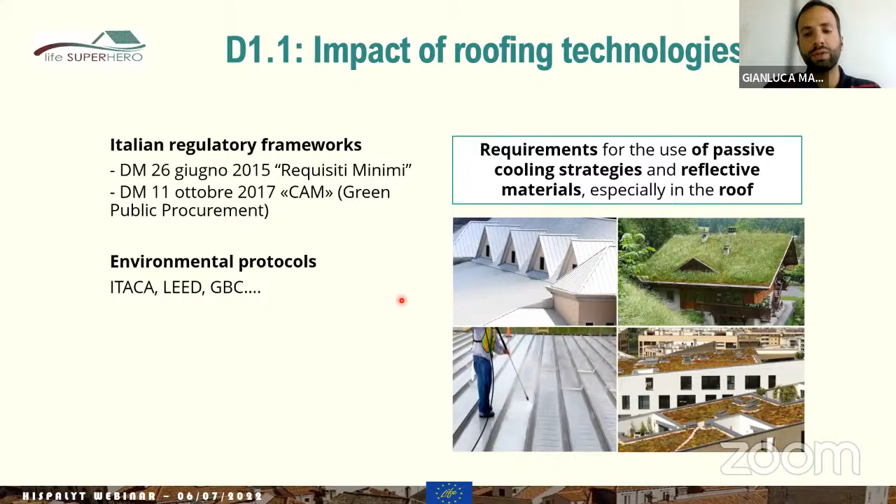It should also be said that cool or green roofs are not always the best solution when considering factors such as the local climate, aesthetics, or meeting local architectural and landscape constraints. Moreover, the reflectance of cool materials, and then their effectiveness, is reduced over time due to aging, atmospheric deterioration, and dust. So these solutions need cleaning and maintenance, which are also quite high for green roofs too.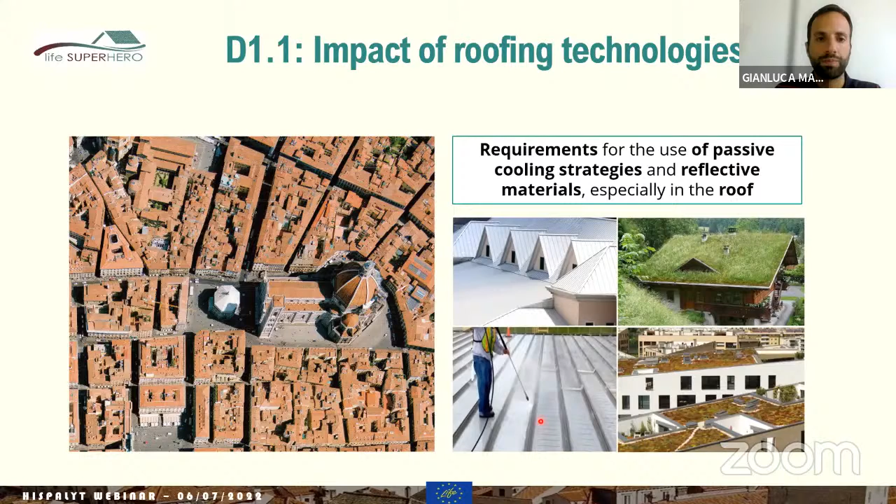Conversely, we know that VPR is a low-cost, low-maintenance, durable solution suitable to be applied in European city centers, and it entails a cooling energy reduction. So the idea of this sub-action is to assess its environmental benefit on the urban climate, considering the heat balance at the roof level, and the air conditioning heat release in the urban canyons.

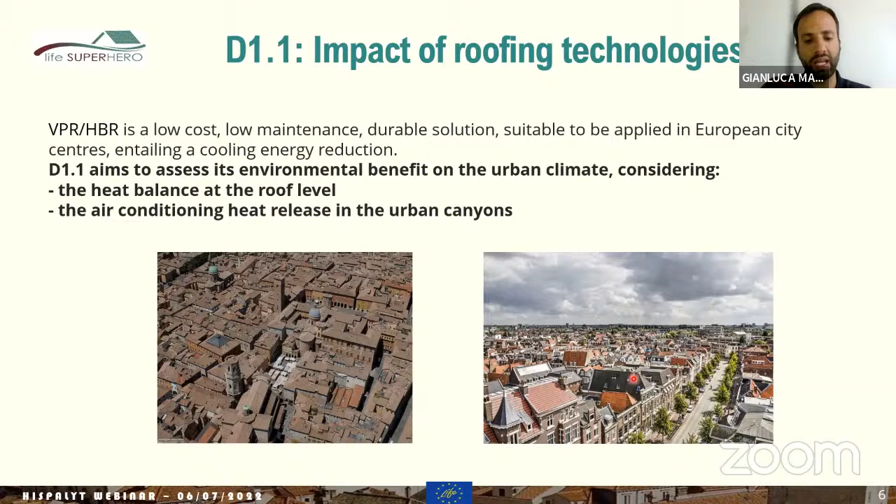Before continuing with this presentation, it is important to define what is intended by the urban heat island phenomenon. Indeed, we must consider that the urban heat island is a complex phenomenon that involves urban surfaces and different air layers that have in common, in the urban area, to be on average warmer than those observed in rural environments.

More in detail, we can distinguish different types of urban heat island, such as the surface urban heat island, the canopy layer urban heat island, and the boundary layer urban heat island. The surface urban heat island refers to the urban surface temperatures, which are generally higher than rural ones, due to the specific properties of the artificial materials used in urban areas.

The canopy layer urban heat island refers to the air temperatures of the urban canyons, or more simply, the air temperature between buildings. The main drivers of canopy layer urban heat island are the heat storage and release due to the thermal properties of the building materials, the anthropogenic heat released from buildings but also from traffic, the short and long wave exchange in the urban canyon, the heat fluxes due to evaporation caused by the presence of vegetation and water bodies, and the wind speed that can be present in the urban canyon and can be different from the rural one.

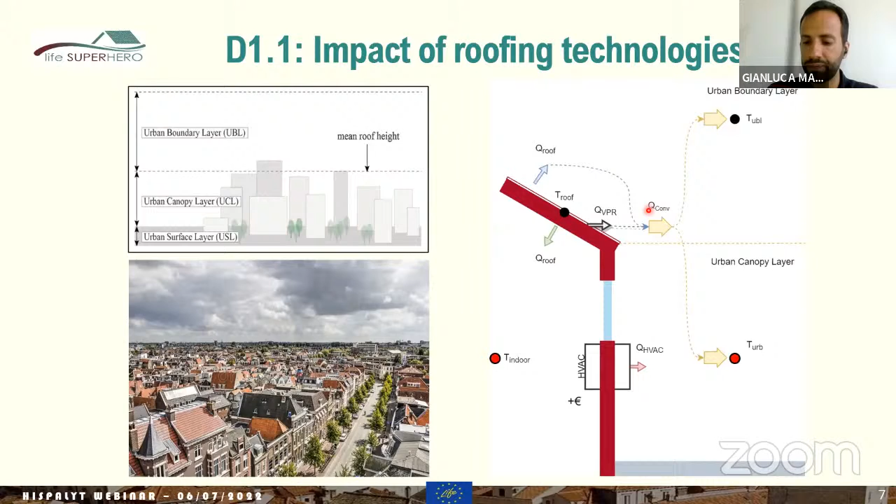The impact of VPR can occur mainly on the temperature of the boundary layer due to thermal exchanges with the surrounding air, but also on urban canyons due to the heat generated by air conditioning machines. To assess the roof interactions with the city's climate, model simulations are needed.

Today, we have different urban climate models that can be used depending on the target scale of investigation. These models have different characteristics depending on the scale, but also differ in the treatment of the land surface and the resolution at which balance equations are written. At the mesoscale or city scale, there are models able to analyze a whole city and its surroundings for several kilometers. However, in these cases the resolution is very low, with grid cells of more than 200 meters. This scale does not allow an explicit representation of urban areas. Moreover, these models require accurate, specialized climatic input data and entail high computational costs.

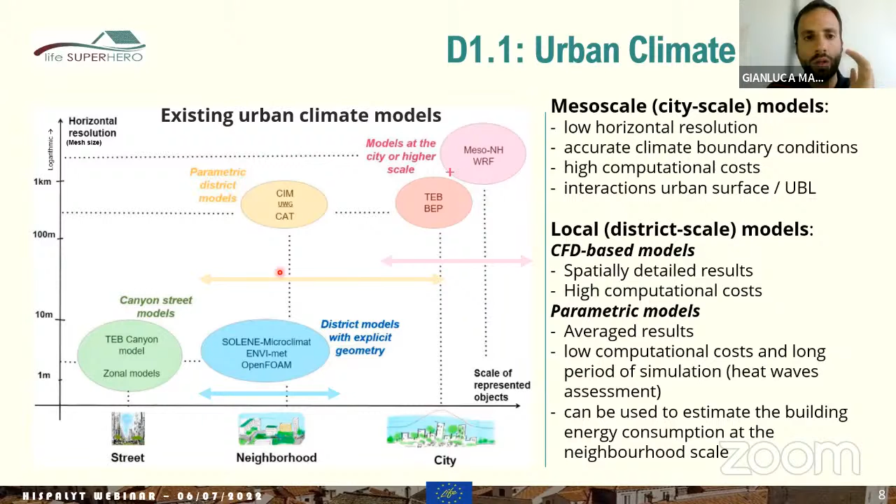Given this picture, for action D1.1 we decided to use the software called the Urban Weather Generator, which is a parametric district model already validated in literature, and allows us to calculate the urban air temperature within the urban canopy layer and the urban boundary layer, starting from the rural weather conditions, also using as input various properties of the target urban district, such as the buildings, streets, the vegetation, the material properties, anthropogenic heat, etc.

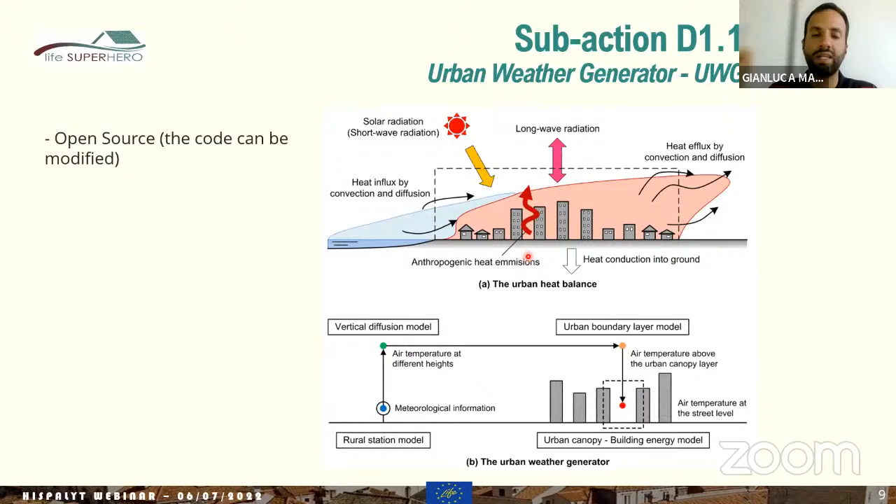The reason behind the choice of this tool is that it is open source, hence we can directly modify the original code, which is written in Python, to model the heat balance of the VPR and its interaction with the urban environment. Moreover, it considers the features of the urban canyon in terms of geometry, surfaces, and material properties. It also provides a good balance between accuracy and calculation speed, allowing us to provide results for a year of simulation. And in literature there are several examples of its application and validation.

In the software, as can be seen from the figure on the right, the urban canopy layer is the atmospheric layer that goes from the ground to the average height of buildings, being representative of the air temperature at the street level, while the boundary layer is basically the air above the canopy layer. In this action we will mainly refer to the urban canopy and boundary layers.

How does UWG work? The UWG calculates the urban air temperature through four coupled physical models based on the rural meteorological data and the city mesoscale information. These models represent the energy balance equations between the air masses above the rural area, above the urban area, and in the urban canyon with the urban elements.

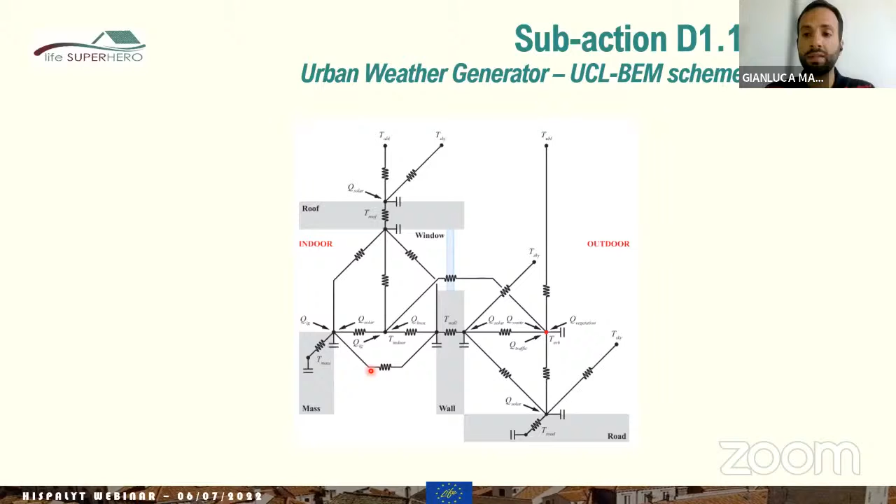In this figure, the resistance capacitance model adopted in the UWG to model interaction between the building energy model and the urban canopy layer is shown, where each resistance corresponds to a heat exchange due to conduction, convection, and radiation between elements and spaces. The arrows refer to the different indoor and outdoor heat gains due to, for example, people, electric equipment, HVAC heat waste, and traffic.

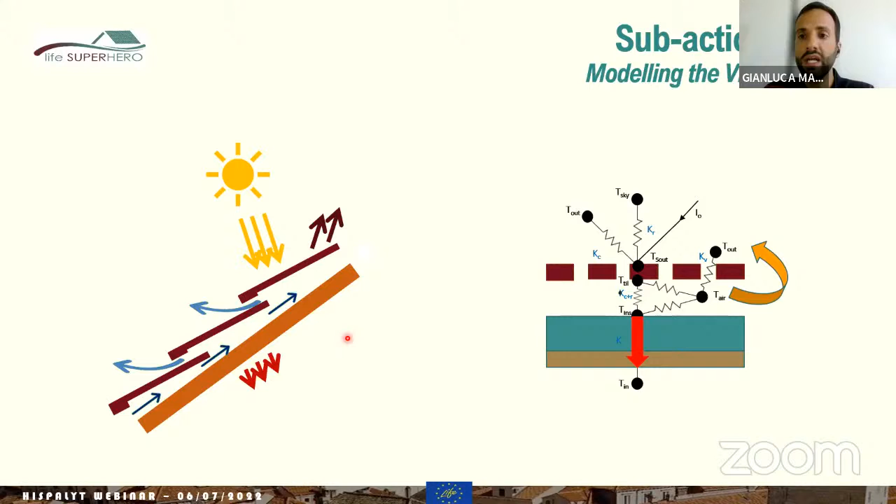However, as we know, in a ventilated roof, the heat exchange is more complicated than a typical roof. Indeed, in a ventilated roof, as in VPR, we have additional and complex convective and radiative heat transfer mechanisms in the air cavity.

In particular, with respect to traditional not-ventilated roofs, the ventilation in the air cavity of the VPR passively contributes to reducing the tile surface temperatures, which in turn contributes to reducing both the related heat released in the outdoor air per convection.

However, the ventilation in the air cavity also releases warm air into the outdoor environment. As a result, the amount of heat transferred per convection from the roof to the outdoor environment remains quite unchanged, even if subdivided into one part coming from the external roof surfaces and another part coming from the air cavity.

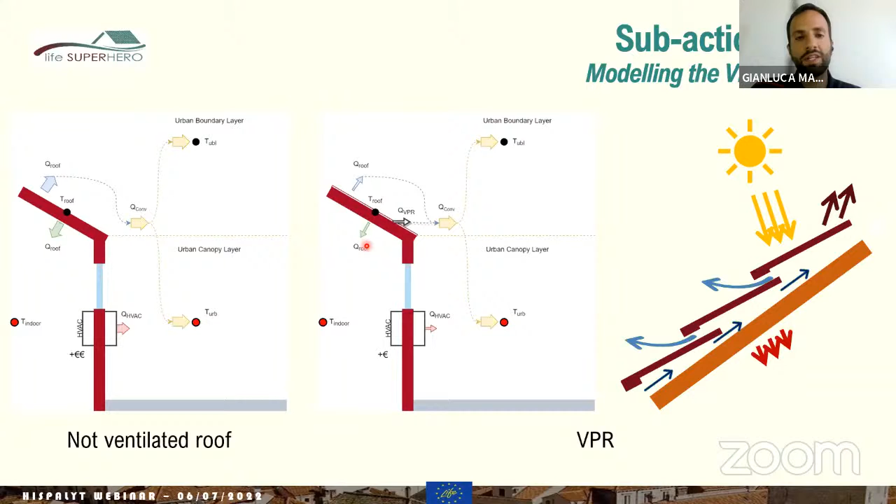Cooler tiles, however, also allow reducing the heat flux entering into the indoor environment. As a result, in a building with VPR, a lower heat waste to the outdoor environment and energy consumption of the air conditioning system is produced due to the passive cooling action of the VPR itself.

To model the VPR thermal behavior in UWG, we modified the actual heat balance equation at the roof level to get the same heat flux entering the building and the same heat released to the external air occurring in a real VPR. In particular, in the heat balance equation of the original UWG software, we consider the amount of heat exchanged through ventilation in order to have the same heat flux entering the building and the same surface temperatures.

The amount of heat removed through ventilation has been estimated in this preliminary phase through the calibration of a building energy model, representative of an experimental mock-up with VPR located in Ferrara and monitored in terms of heat fluxes, surface, and air temperatures during the previous HEROTILE project.

In particular, we have seen that the heat removed through ventilation inside the VPR air cavity varies its intensity during the day, and it can be considered proportional to the solar radiation that hits the tiles during the day. So we consider this proportionality to estimate the orange arrow in the figure during the different hours of the day within the UWG software.

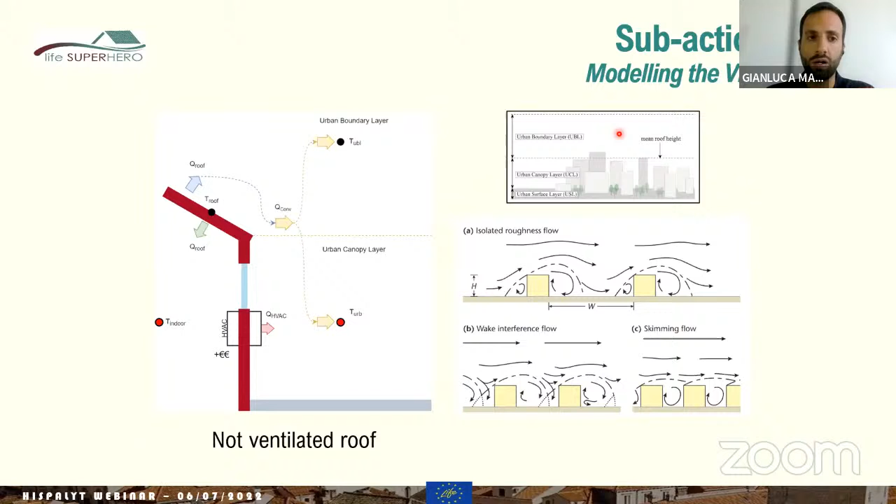So again, to consider the heat exchange from the roof to the outdoor environment in the two different scenarios, we modified again the original code. In scenario A, which is the most common, the most frequent, the overall convective heat from the roof, which entails both the normal convective heat and the ventilation in the air cavity, is added directly to the energy balance in the boundary layer. In scenario B, which is less frequent but still possible, the overall heat from the roof is added to the energy balance in the canopy layer.

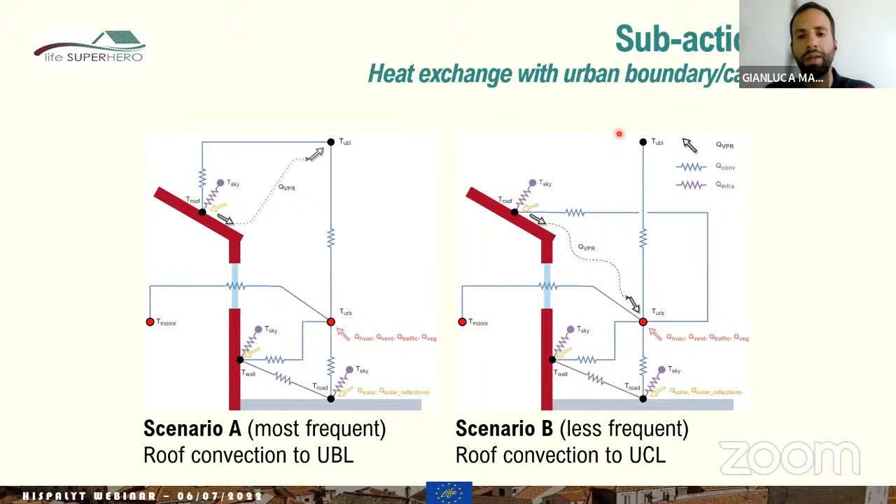Considering this approach to model the interaction of VPR with the urban environment, we carried out some preliminary numerical simulations to test the model and compare the results of three different roof typologies: metal roof, cool roof, and VPR. In the next slide, the preliminary results are reported in terms of indoor and outdoor heat gains.

The considered roof typologies are characterized by the same thermal transmittance but different optical properties. For the cool roof, a typical aged albedo value used in literature is considered. Future simulations will consider other roof features and solutions, also considering different thermal transmittance values and optical properties. The simulations are carried out considering a common urban scenario corresponding to a typical city center, in this case the city center of Reggio Emilia in Italy. All the buildings are considered to have the same roof typology and to be cooled during the whole day.

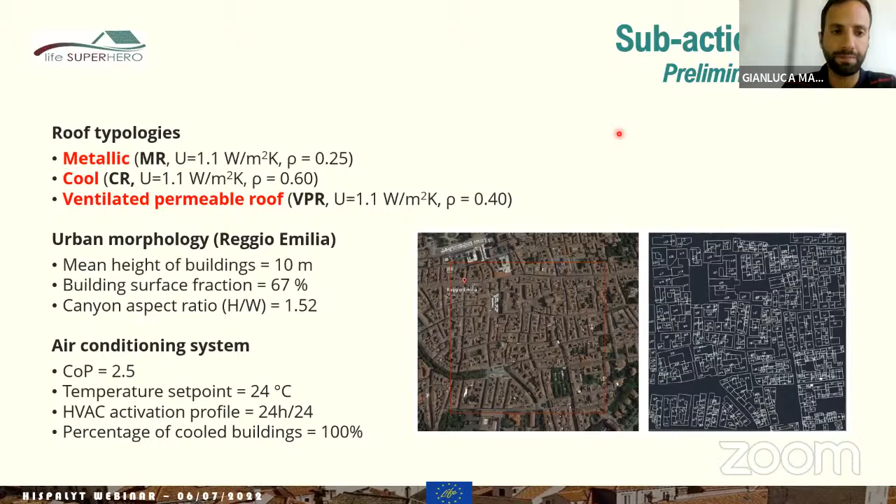Let's see the first results. This is the last slide. Regarding the indoor heat gains from roof, the main difference between the different roof typologies lies in the different heat flux entering from the roof.

The results obtained in scenario A, where the convective heat from the roof is released in the UBL, show a reduction of about 35-36%, going from the metal roof, which as expected is the worst performing solution, to the cool roof and the VPR solution. Similar results have been obtained from scenario B, where the convective heat from the roof is released in the UCL, where a reduction of about 37-38% is obtained. Thus, in these terms, the performance of cool roof and VPR are quite comparable.

However, if we look at the outdoor heat waste due to air conditioning, both the cool roof and VPR solutions produce heat released by the HVAC system in summer lower than the metallic roof, with a difference between 6 and 8% in both scenarios. It should be noted that these differences refer to the entire building and not to the attic floor only. Moreover, due to the passive action of the cool roof and the VPR in reducing indoor overheating, lower energy consumption and costs are obtained in these cases compared with the metallic roof solution.

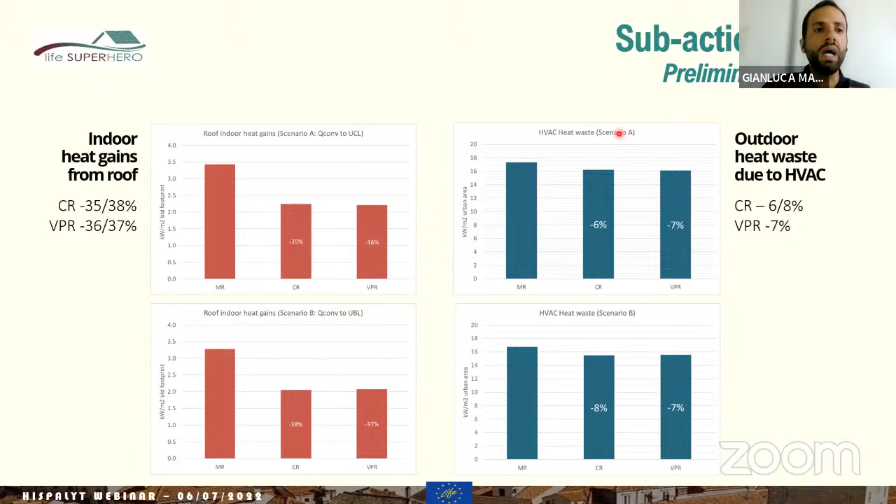As I already said, this was the last slide. That's all from action D1.1. These are just preliminary results, so we will deepen our results in the next months, especially regarding the results in terms of air temperature. I am available for questions if there are some. Thank you very much.

Thank you very much, Gianluca, for telling us about the development of software to model the interaction between clay, ventilated and permeable roofs and the urban environment, and to assess their impact at urban scale. It is remarkable, the comparison of the ventilated and permeable roof, VPR, with different roofing solutions such as the cool roof and the metal roof. Well, once the presentations are over, we open the debate.